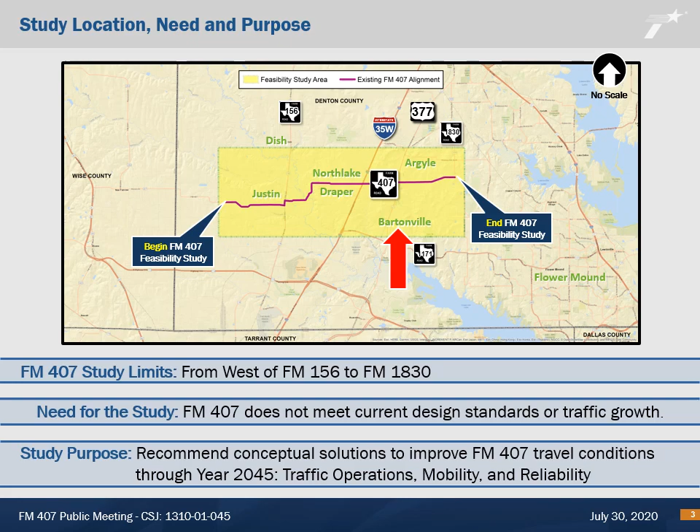There are several steps in the feasibility study process. Today we are conducting Step 4, which presents the recommended build alternative for public review and comment during this virtual public meeting. This alternative entails the reconstruction and widening of FM 407, FM 407 intersection improvements, and the preliminary right-of-way footprint necessary to construct the build alternative. Step 5 concludes the study with production of an FM 407 feasibility study report.

After the study is completed, the next step will be FM 407 roadway schematic design, environmental analysis, and further public involvement to determine the specific FM 407 roadway design and right-of-way dimensions.

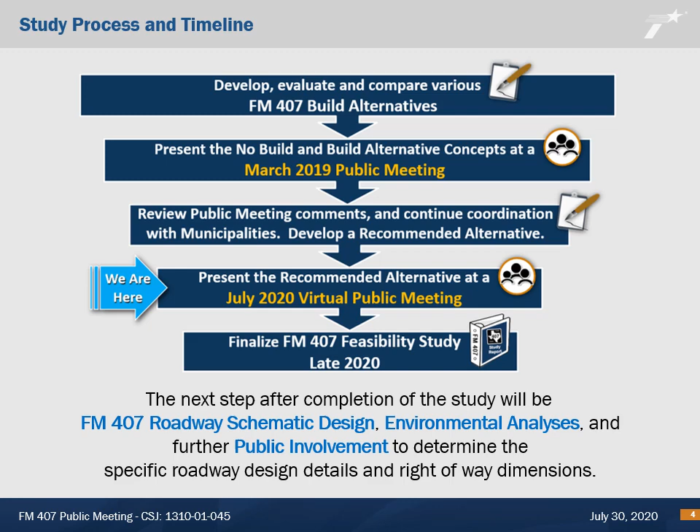After the completion of this study, the department forecasts these next step phases beginning with roadway schematic design, environmental NEPA studies, and further public involvement outreach. After this first step will be construction plan design and utility coordination and relocations. The final third step will be FM 407 roadway construction. After completing the schematic design, right-of-way preservation occurs via land use planning and right-of-way acquisition. Please note the listed dates are subject to change.

The build and no-build alternative evaluation and comparison process involved travel demand evaluations along FM 407 in the form of forecasted design year 2045 traffic volumes, traffic safety evaluations including crash history locations, minimization of impacts, and municipality and stakeholder agency coordination.

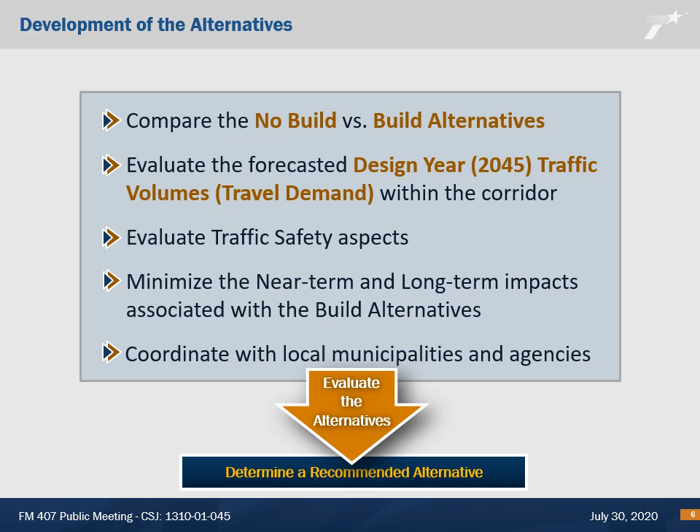The existing FM 407 typical roadway section within the study limits consists of one 11 to 12 foot wide travel lane in each direction, with adjacent 1 to 11 foot wide shoulders and no center median. The existing FM 407 right-of-way width varies along the corridor but is overall approximately 80 feet wide.

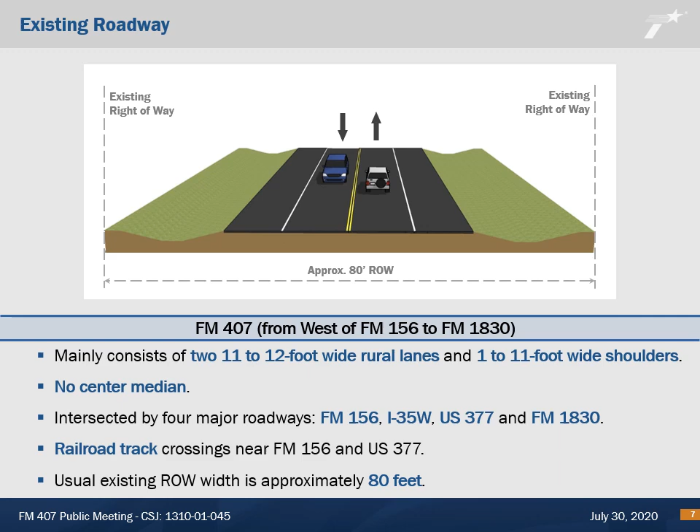Taking into account the study's previously described need and purpose, the study produced this Build Alternative Alignment exhibit, which was presented at a March 2019 public meeting conducted by TxDOT. Comments received at the meeting were taken into account when each no-build and build alternative concept was later evaluated via a quantitative and qualitative screening analysis.

This analysis included screening evaluation criteria such as mobility and traffic operations, engineering, environmental and cost considerations, and accommodating town, city, and county objectives such as planned and ongoing development and local thoroughfare plans earmarking travel lane count and capacity improvements along FM 407. The three specific sections of the FM 407 corridor evaluated by the screening analysis are noted on this exhibit. The matrix screening analysis exhibit can be viewed on the project website at www.keepitmovingdallas.com/FM407FS.

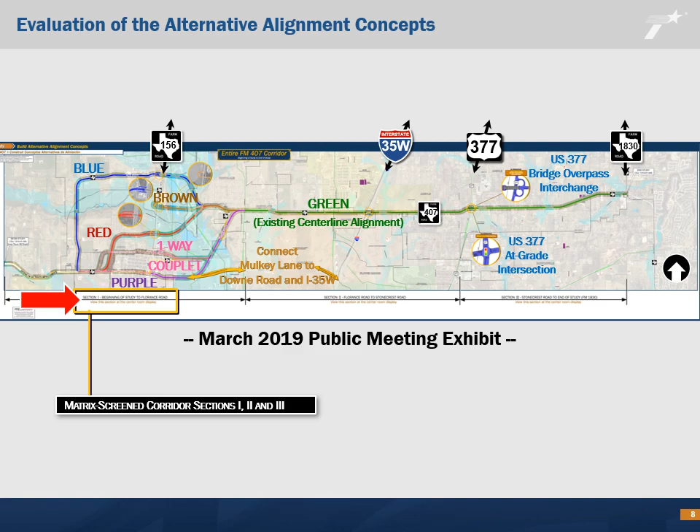Having completed the alternative alignment exploration and matrix evaluation processes, this virtual public meeting is now presenting the study recommended build alternative, which is composed of the red and green alignments. This recommended build alternative exhibit can be viewed on the project website at www.keepitmovingdallas.com/FM407FS. As noted on the legend in the upper left portion of the exhibit, the recommended FM 407 build alignment is depicted by the green and red linear shapes.

The outer edge of each green and red shape indicates the approximate recommended right-of-way width. The darker interior color of each green and red shape indicates the approximate recommended FM 407 roadway width.

The recommended build alignment adheres to a minimum design speed of 40 miles per hour. Any existing cross-street and driveway access to the existing FM 407 travel lanes will be restored when FM 407 is reconstructed. The specific access design details and the locations of the median left turn lanes will be determined during the future FM 407 roadway design phases.

The build alternative roadway is composed of 3 eastbound and westbound FM 407 travel lanes, as shown on the exhibit. The build alternative is approximately 13 miles long, and the estimated construction cost is approximately $204 million.

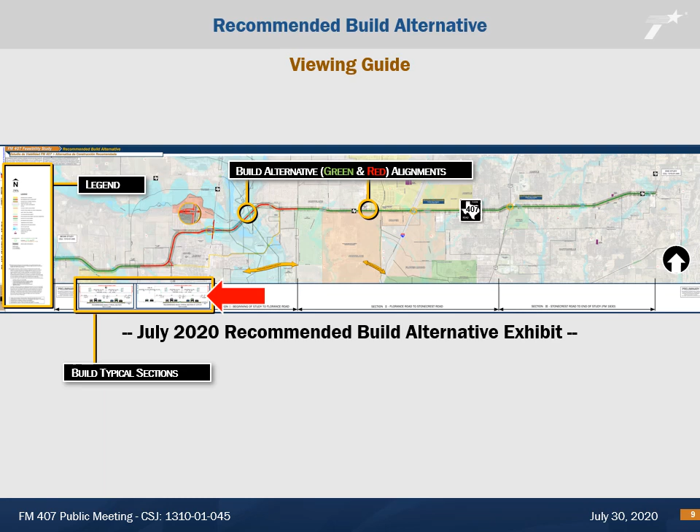The recommended build alternative includes bridging over FM 156 and the Burlington Northern Railroad within the city of Justin. Within the town of Argyle, FM 407 will remain an at-grade signalized intersection at US 377 and the Union Pacific Railroad. The recommended build alternative also includes access links to and from the existing FM 407 roadway.

The green shapes depict the recommended build alignment widening of FM 407 along the existing FM 407 roadway centerline. The red shapes depict the width of the recommended FM 407 build alignment located west and east of FM 156 within and near the city of Justin.

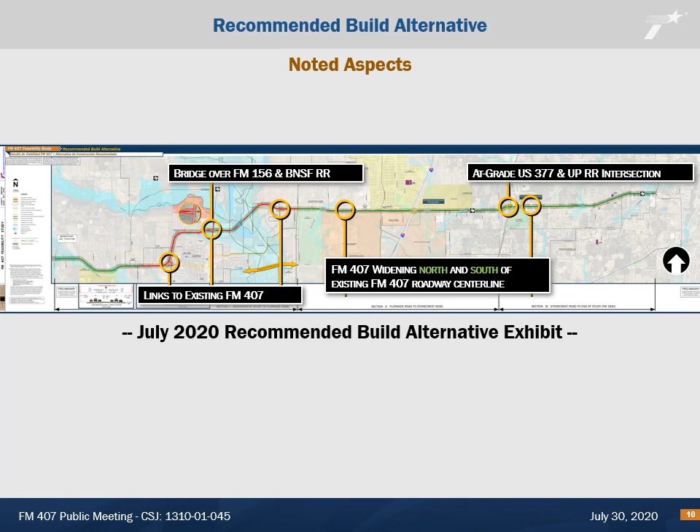The portion of the recommended build alternative specific to the city of Justin is a new location alignment that spans or bridges over FM 156, the Burlington Northern Railroad, and the Denton Creek floodplain. The alignment is also partially located south of existing 12th Street in the city of Justin.

Recognizing that no individual build alternative would entirely avoid any type of impact within the corridor, the basis for recommending the red route includes pro and con matrix screening comparisons of all the alternatives, both build and no build, input received from the city and county offices, and functionality of the alternative.

The Brown route was not selected because it did not provide a continuous route for FM 407. FM 407 traffic would still have to travel on FM 156, which is not desirable since FM 156 would already be at its traffic carrying capacity limit by year 2045.

The Couplet and Purple routes were not selected because they did not provide grade separations over FM 156 and the adjacent railroad. The Couplet also does not provide an optimal 6 total travel lanes.

Traffic forecasts and analysis indicate the red route would be more functional, specifically more utilized by travelers in reaching their desired destinations within Justin and south of Justin.

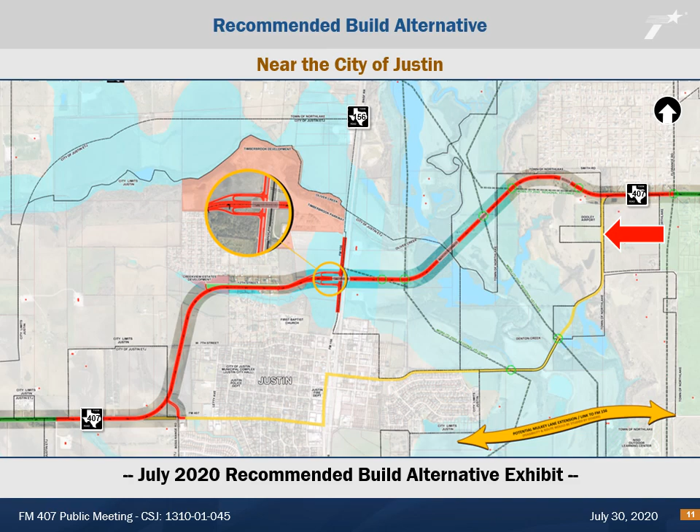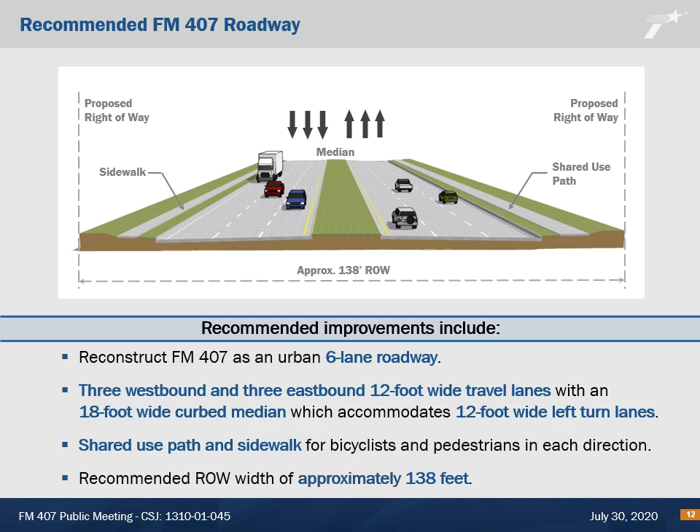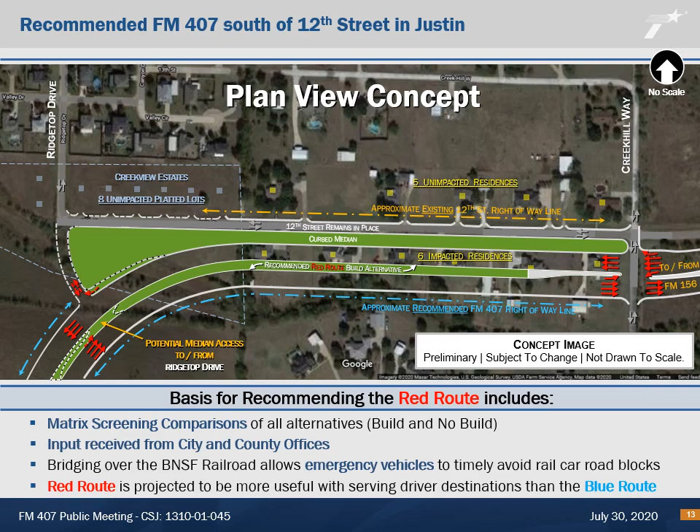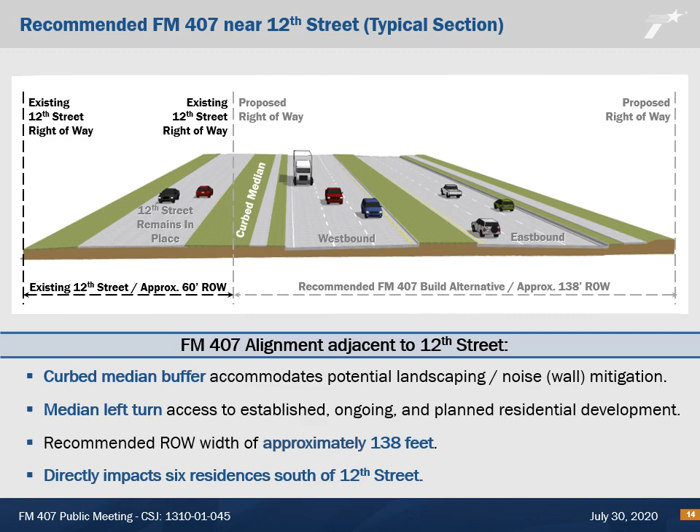The recommended typical section along 12th Street and on the south side of 12th Street is also 6 travel lanes. A curbed median is proposed to separate proposed FM 407 and existing 12th Street, which would remain in place.